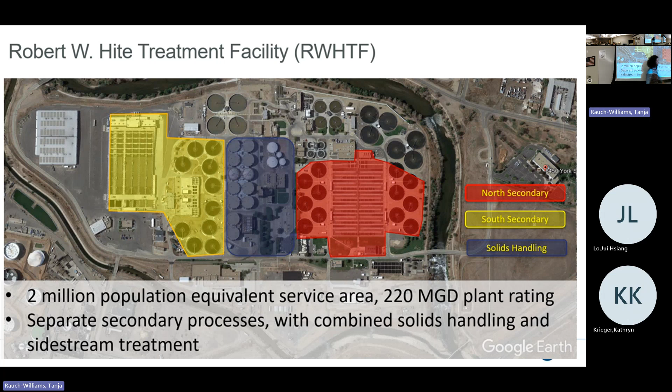And then here, likewise, it's a different layout, but here are 6 aeration basins. And we'll talk a lot about these little tanks. Here, there are 4 tanks up there because they are really a powerhouse for us for nutrient removal.

To point out a little bit more about those basins, if you look at the north, several years ago, when I actually just started my career in the state as a consultant and designer, we worked with Metro. I was a consultant at the time at these basins. We're using these in terms of a side stream treatment. I'll explain a little bit more about that.

But are any of you interested in process of wastewater treatment? Okay, a few of you.

So these are concepts that I will explain, how we actually innovate treatment, concepts that you can apply to other things in the future. So if you think generally about what we did with these basins, you can apply that to other things and innovate and name a process after yourself in the future. Because there are still many opportunities like this.

So we're using those basins for intensified nutrient removal. We have basins here in the south that we are using for intensified nitrogen removal. And what else do I want to point out? Centrate is very important. Centrate, I want to just put that out here right now in terms of nutrient removal

is important because as we bring primary sludge and secondary sludge into the digesters, it's just like your compost pile in the kitchen. You hold it there, and after a while you get this liquid in the bottom. It stinks, but it's super rich in nutrients. You get nitrogen and phosphorus in there. And usually it would be recycled. So about 30% of the nutrient load is constantly recycled in these facilities.

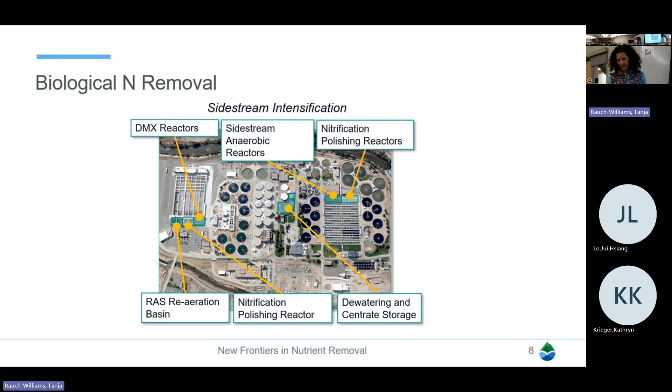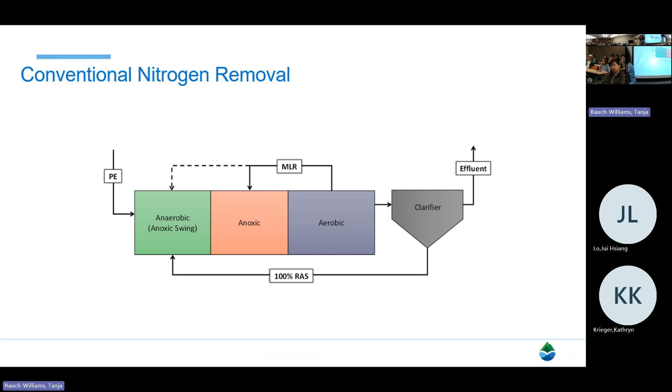How do we get the nitrate here? Well, we nitrify the ammonia to nitrate in the aerobic zone under air and bring the nitrate back. So this is very traditional, and most facilities today operate in this very fundamental process.

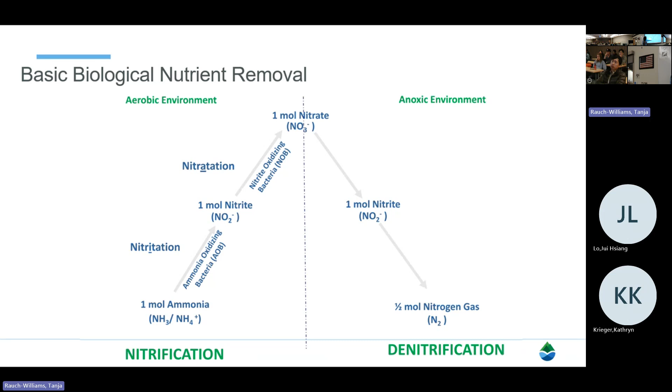So this is just the very traditional nitrate cycle where we have ammonia in the wastewater, we aerate it, we produce nitrate, and then we denitrify it. About 10 years or so ago, the science of anammox, which is a different type of bug that essentially uses ammonia and nitrite, 50-50, this bug uses both of those nitrogen sources to go straight down to nitrogen gas.

We researched that bug for probably 20, 30 years. When I did my PhD, we just started looking at it in soil. And then really in the last 10, 15 years, we figured out how to actually select for this bug in wastewater treatment processes, and now can capitalize on it because the advantage is we're not going all the way to nitrate. We're using way less carbon.

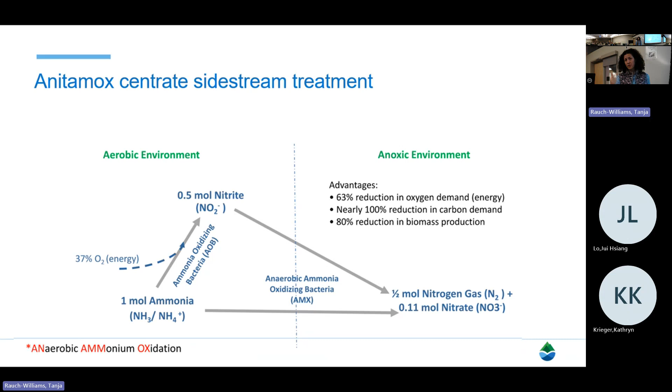Carbon means we can remove more nutrients. We can recover the carbon in terms of energy. We put less air into the system. So there's a number of benefits. And so what Metro did in one of these small tanks that I showed you on the south is, where do we have a lot of ammonia? In the centrate. So we're bringing in the very high streams.

That's something to look out for as a process engineer. You always look for the high concentrated streams and do treatment right at that source. We bring the centrate into one tank. Anammox are very small, slow growing. So what do we do as process engineers? We put support media in there that we keep in the tank.

In this case, it's these noodles. I'll show you a picture of it, but it's just like when you were a kid and your mom made a noodle soup. It's like these noodles on which we are building up these bugs. And so then all we got to do is stop the process at nitrite. We can do that by eliminating what we call the NOBs. So these are nitrite oxidizing bacteria.

They are going from nitrite to nitrate. We don't want that because we want to accumulate the nitrite. We do that by pH control and SRT control because they grow slightly slower than the AOBs, so we can wash those out. We've got nitrite and we can do that process. We do that by bringing centrate in, and then we bring that over.

The nice thing about this process is it removes already 80% of the ammonia, brings it down to nitrogen gas. We get about 11% of nitrate. That's just the stoichiometric limitation of the process. And we have a far lower load of nutrients on the mainstream.

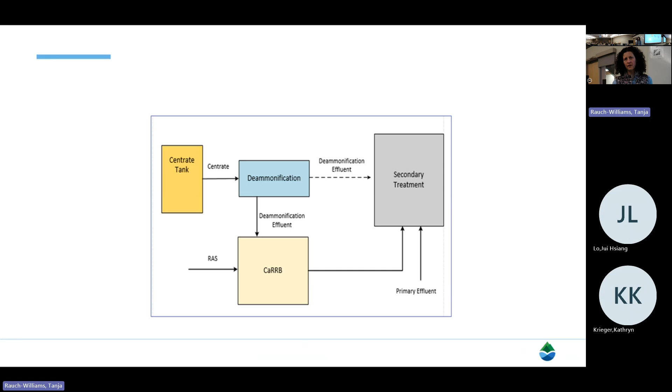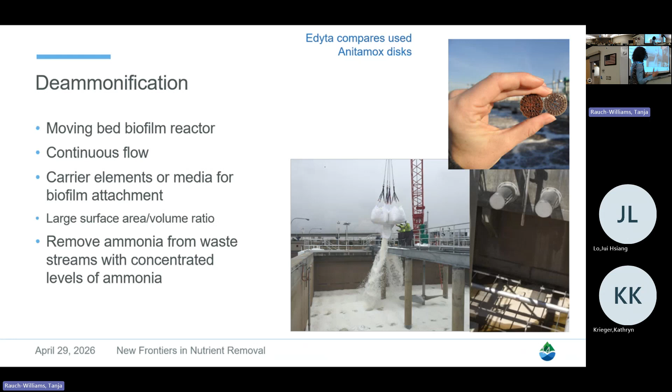We put in aerators on the bottom, and then those are sort of sieves because we've got to get the water out, but the media needs to stay in the tank. And so over time we grew those bacteria and removed quite a bit of ammonia with it.

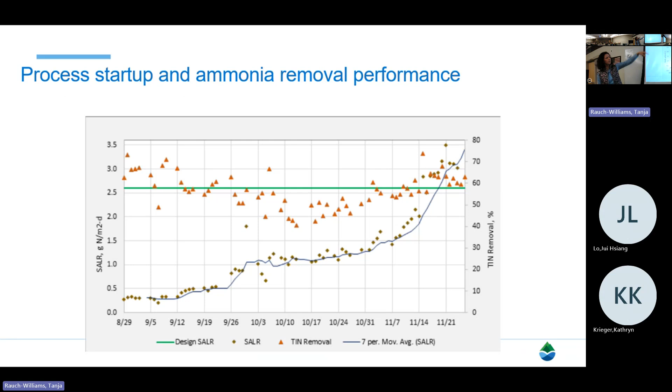So this just shows you when you start out a process, the ANITA Mox process, that's what it's called. You load it first relatively low on ammonia loading rate, and then over time you increase the loading rate and remove more of the total inorganic nitrogen. That's shown here in red. So we get about 60–70% removal. And I think by now we're up to 80–85.

So one other intensification step that Metro implemented, which is, I think, really cool. It's actually a very similar way of thinking. So I showed you this zone. This is an anaerobic zone, meaning we have no nitrate, no oxygen, and we need that in conventional nutrient removal because we know that the bugs that love to take up phosphorus in excess, because we want to remove the dissolved phosphorus from wastewater. There are bugs that take that up in excess, but they need to be exposed to anaerobic conditions, meaning no nitrate, no oxygen, in which case they take up a lot of carbon.

They actually, in this zone, ironically, they put out stored phosphorus that they have, but when these bugs get then into the aerobic zone, they take up excess phosphorus. So interesting bug. If we design as engineers this zone into the mainstream treatment, we need about 15% of the basin volume. And we are exposing essentially these bugs to a concentration of the biomass, let's say around 3,000 milligrams per liter. This is a typical what we call mixed liquor.

Sounds better than it looks. Mixed liquor is what we call the witch's brew, where we have these bacteria, we aerate it, it's essentially sludge, and the concentration of which is about 3,000 milligrams per liter. If we were to do the same process at, let's say, 6,000 milligrams per liter, what would that do to the volume we need? Anybody? It'd cut it in half.

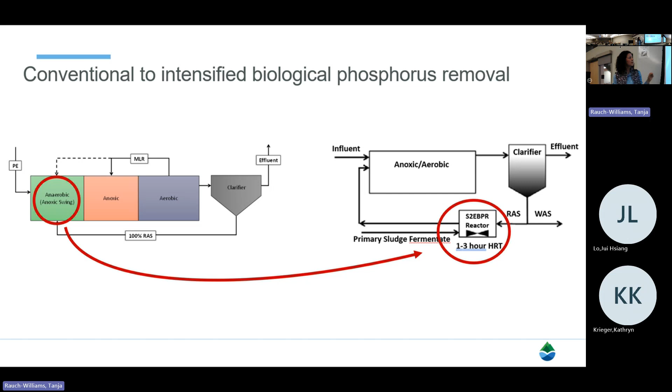So there's one other ingredient we need. We need the biomass that comes in, but we also need the carbon, right? So I mentioned that these bugs, they like the candy food, so the volatile fatty acids, that really gets them going and their metabolism. So somewhere we need to get the carbon in. And the neat thing at Metro is, this is now a side view of the same area I showed you earlier. These are actually the basins we are using because we bring the RAS from these clarifiers directly into that zone. The carbon comes from here. These are gravity thickeners. What we do in gravity thickeners is we take the primary sludge.

So when wastewater comes in, one of the first treatment processes is also a clarifier, where we remove a lot of the carbon that we bring in with toilet paper, your kitchen stuff, right? All of that, very carbon rich. We put that sludge into the primary, into the gravity thickeners, and we let it sit there. Again, fermentation. So the carbon is being broken down.

We have a lot of VFAs, and it was conveniently very close to this basin. So all we do is we let that sludge settle in there a little longer, several hours. We let that sort of ferment or decay, and we bring the supernatant from these clarifiers over into that basin. And it worked out. We didn't know whether it would work out 15 years ago, but we tried it. It was relatively minor modifications with some piping. But within days, when Metro did that switch, phosphorus dropped below 1, which was really exciting.

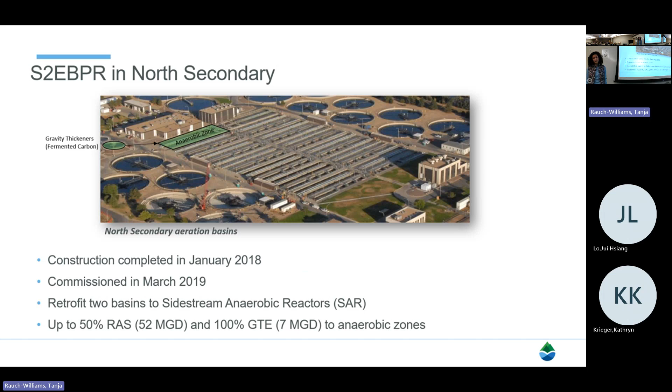And the benefit, again, was that we have now only 2 zones that have anaerobic treatment. We concentrated in side stream treatment instead of going into each of these basins. These are 3-pass basins, but we have 12 of them. You would need to go in and modify each of these basins to put a baffled zone in, put mixers in, and make them anaerobic. So from a design, from a construction, and from a process, it was a very slick and elegant solution to implement phosphorus removal. Here's some data from that.

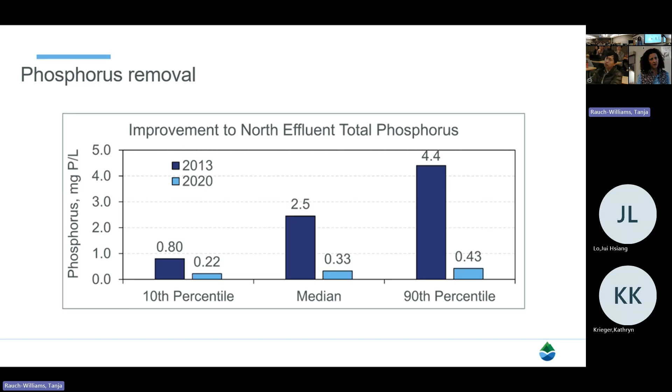So improvement in the north, effluent total phosphorus in 2013. Those basins hadn't yet been implemented. So the median, we were over 1 milligram per liter. The utility needed to get below 1. I showed you this earlier. And with the implementation of that side stream treatment process, we dropped below 1. Pretty courageous, because there were only very few, I think 2 other facilities at the time who had a similar process.

So now we had phosphorus removal, but the trouble started. It just started elsewhere. When you have phosphorus removal, we call that enhanced phosphorus removal. The bugs suck up the orthophosphorus. Where do they go next? In the secondary sludge. Where does that go? Into the digesters. The digesters, I explained to you, are anaerobic. So all that phosphorus is again excreted from the bugs. So now we have a lot of orthophosphorus in the digestate, what we call it.

And phosphorus, magnesium, we always have some magnesium. I also said we had ammonia, which is released. That is just a vicious combination, forming struvite. Struvite is a mineral that settles when we exceed the precipitation point from the chemistry. It precipitates in pipes. It precipitates specifically where we have high pH.

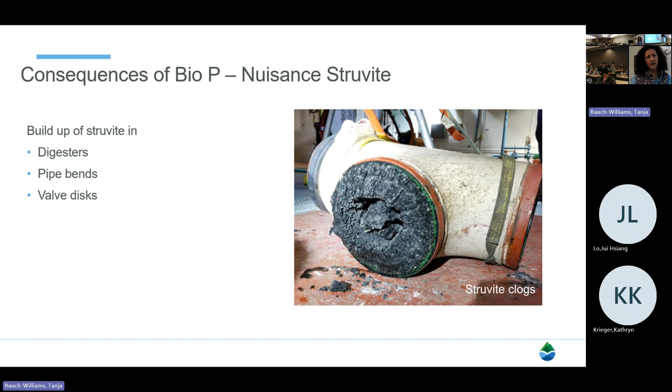And so what we found is that a number of utilities, not just Metro, that have implemented BioP, have created these types of sedimentation and buildup of struvite in pipes, in valves, in centrifuge bowls. It's not fun for operators and for maintenance staff. So we needed something to intercept that. And so it's sort of a very quick history of BNR that many utilities, not just Metro, go through.

So the next generation of what we are focusing on in the industry, and Metro and Fort Collins were the first to implement this technology about 8 years ago in Colorado, is we need to intercept that the phosphorus actually builds up and creates struvite unintentionally. We want to have struvite intentionally because it's a really good fertilizer. Very slow release. If you come to Metro, I can show you where we store it. Get your hands on it, put it on your tomato plants. It is a really good fertilizer. But we want it intentionally removed so that we don't have to scrape it out of our pipes.

So how do we do that? We take the digestate, we put it into that large reactor that you see over there. It's actually the largest reactor, I think, in the world. Amsterdam is very large too, but I think this one is larger. So we put it into that reactor. Now we need to form struvite. How do we do it?

We put magnesium in the form of magnesium chloride. We need to get the pH up. So we aerate it. What does aeration do? It strips out the CO2 that we get through the decay of biomass in the reactor. And so we're intentionally forming struvite in there. And the struvite can be recovered.

It looks like sand. I don't have a photo of it. This is just make-believe, but it actually looks like you're walking on beach sand. It looks like that. And it's good. We give it to Ag 1. Unfortunately, we don't get any money for it. I want to change that. They mix it under their fertilizer, sell it, and consumers enjoy a good product.

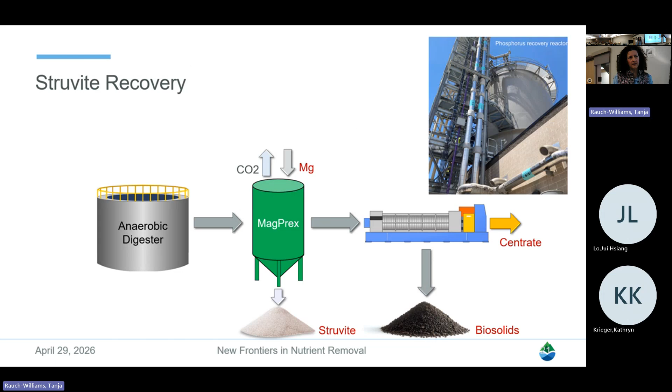Don't let your professor answer. Come on. Are you a professor? Okay, anybody? Venture a guess.

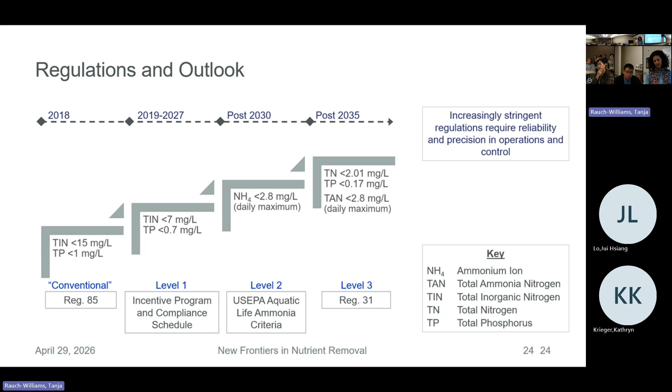And it will be interesting, because the expert panel explicitly says in their report that regulators should not put regulations in place that require utilities to use RO in the future. If CDPHE was to accept that, that will already be a very interesting gateway decision for our state in terms of meeting those requirements and how we implement permit requirements.